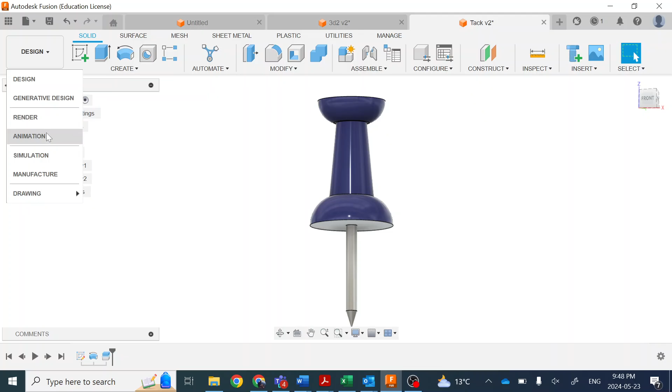Okay, so I want to guide you through how to create this thumbtack. And here's a rendering of the thumbtack here that I've created. You can see it in that image there or right here. I can save this as and download it as a JPEG if I wanted to. But that's what my 3D model ended up looking like of this tack.

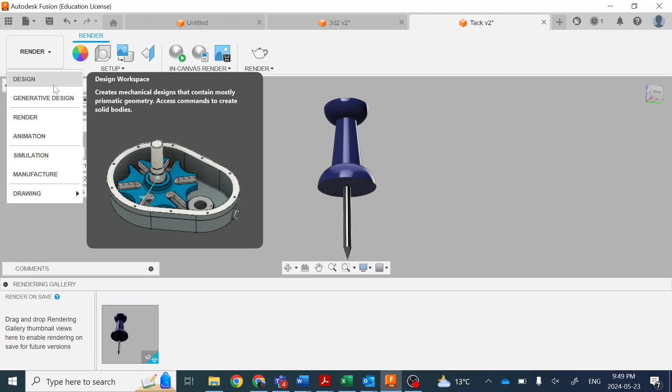So let me go into the design part of Fusion, and here's my design here. If I look at my timeline, you can see that I've actually only done 3 operations to get to this point. I press play, start with a sketch, creates a body, and then I actually just separate the 2 bodies and add an appearance to each of them. The sharp steel part as well as the plastic top.

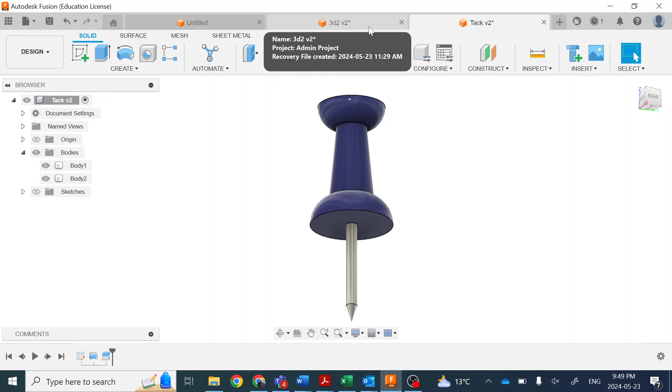Alright, so let me show you how you can do that. So I'm going to start a new design, and I'm going to start by saving it, and I'll save it as thumbtack, save, and then I'm going to start a new component. I'll call that thumbtack as well. Even though this is just going to be one component, it's a good habit to get into. You can see it shows up in our browser there.

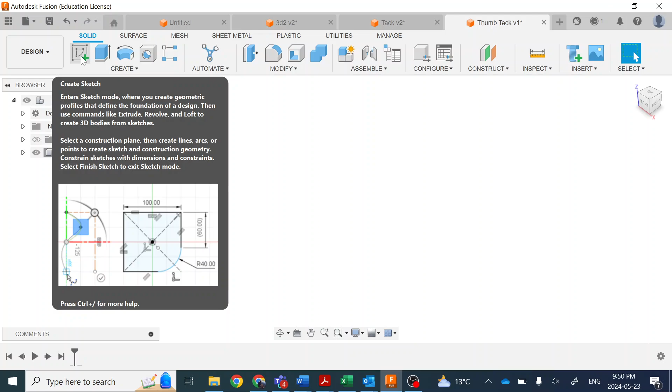Okay, just like always, we always start a model with the sketch, or typically we do. I'm going to start in the XZ plane here, so I can either click at that point there, or I can go under origin and go to XZ there. Alright, so now I'm in my sketch mode here. My sketch toolbar has showed up, and I'll show you what we're going to be sketching.

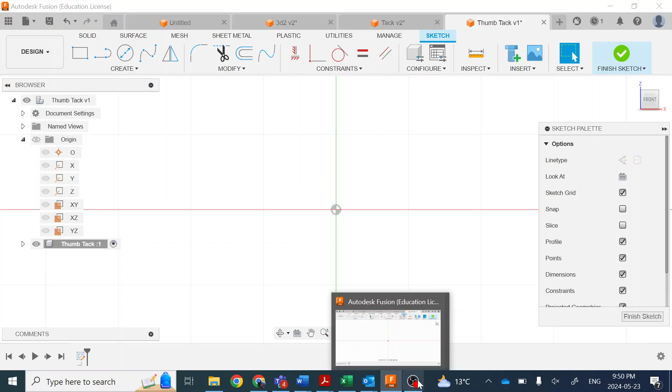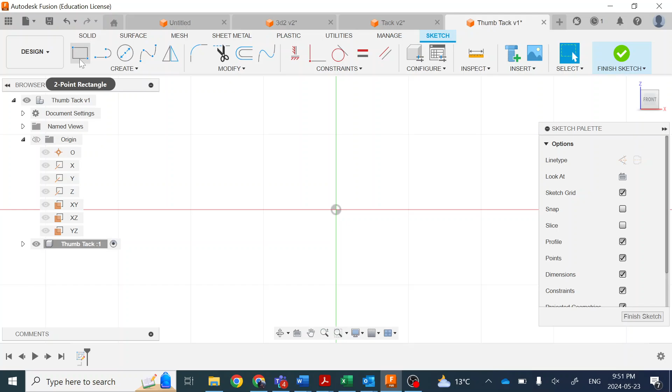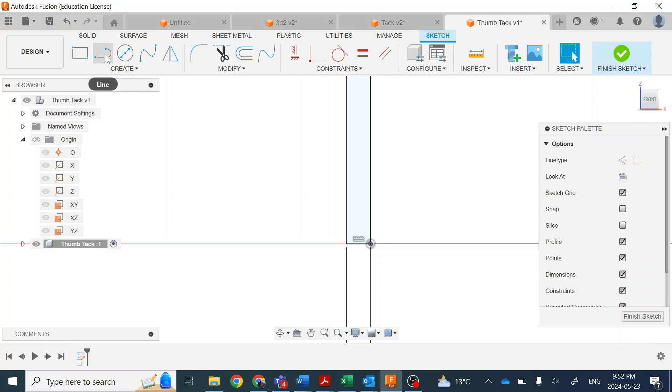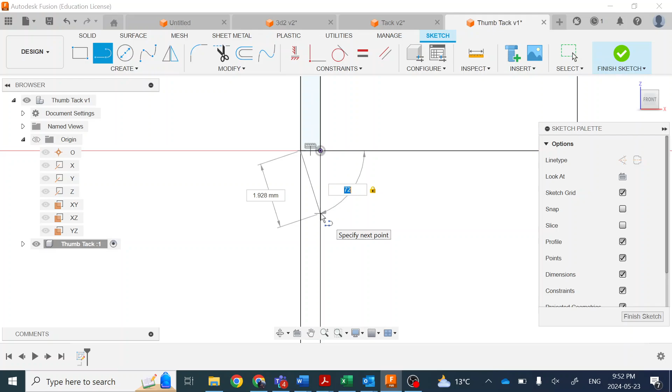Now from this point to this point here is 90. So I actually just want to subtract 18 from 90, which is going to be 72. So I'll type that in there. And you can see it's locked in. And I'm going to take it to that mid line there, right there. And I'm going to draw a line up as well. Now I'm going to make sure I got a vertical constraint on there so that it's locked in vertically, this line to that line. And you'll see that it turned black now. And I got that vertical constraint glyph there as well. Okay.

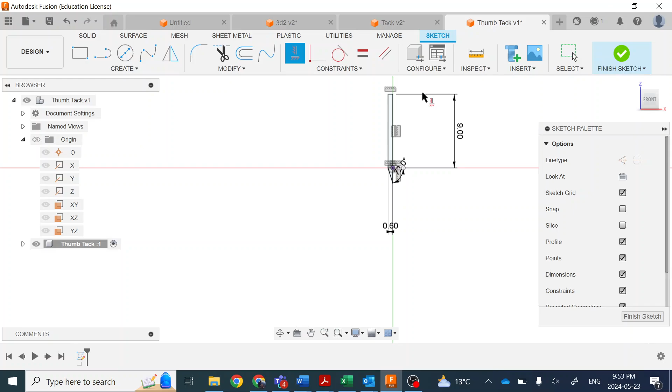So I'm done with the steel part of it. So now let's just go back to my image here. And you'll see that this rounded over portion, it goes up 3 millimeters. And that the total diameter, if I look at the extension lines, is 9. So I know that this line here is going to be 4.5, half of 9, and it's going to go up 3. So I'm going to start with that.

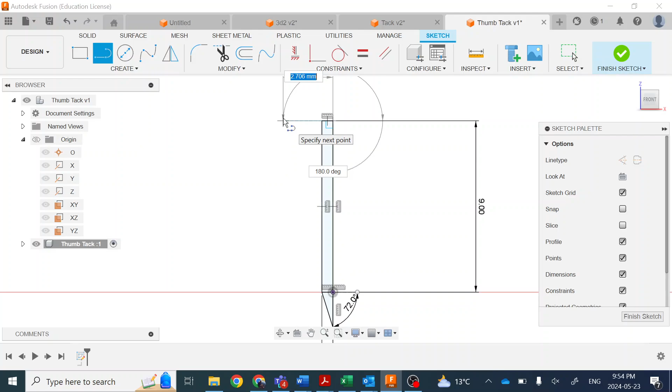So from this point here, it's going to go over 4.5, half of my diameter of 9. And I'm going to go up another 3. Okay. And now I'm going to turn off my dimensions just so I can't see them because they're kind of getting in the way.

And if I take a look at my PDF, I know that from this point here up to there is a radius of 3.2. All right, so I know that if I draw a temporary line from this corner here, 3.2 back, that's also going to be my radius. And that's going to mark the center point of a circle or an arc. Okay, so let me show you that.

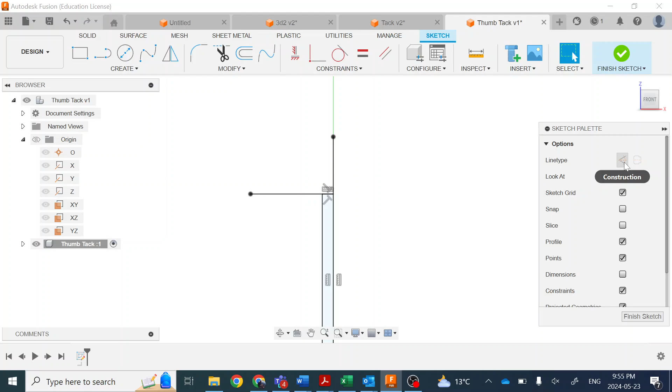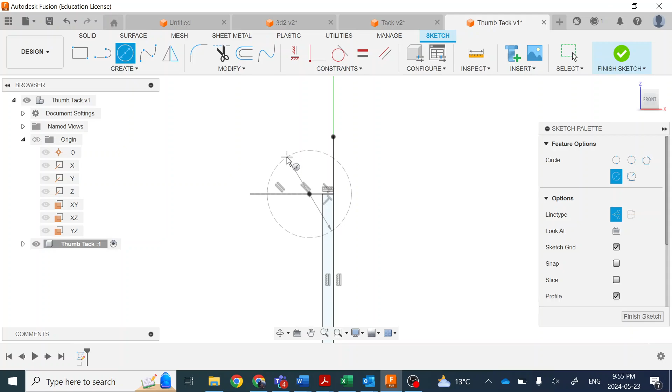I'm going to draw a construction line. So I've clicked on my construction. And I'm going to go over 3.2. Okay, so that gives me a mark right there. And now I'm going to draw an arc, or I can draw a circle with a radius of 3.2, which would be a diameter of 6.4. All right, so I'm going to use my center point here. Draw a circle. Now I'm going to get out of the construction line because I want to actually keep this. And draw a circle in there.

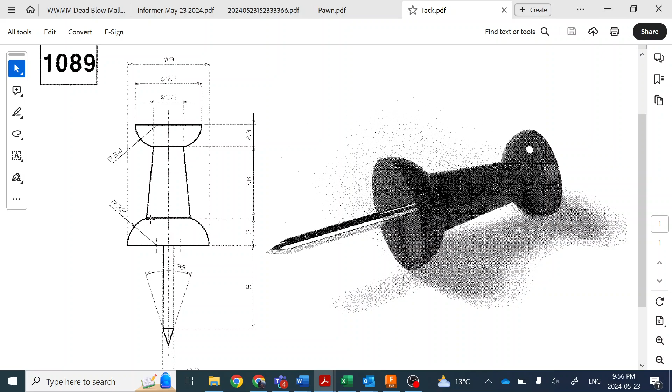Okay. So I'm going to end up trimming quite a few of these lines here. And I can start with this one down here, just so it's not so cluttered, and that there. And now I know that this diameter here... well, actually, we don't necessarily know the diameter of this line here, but we know where this line here going 3 up intersects with that circle is going to mark this point here. So this is a bit of a puzzle to be solved. It's not super straightforward.

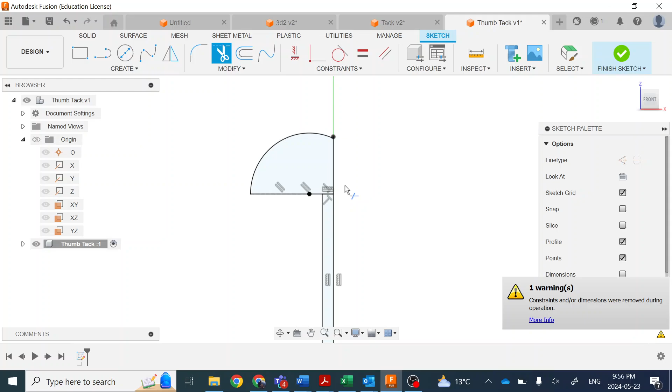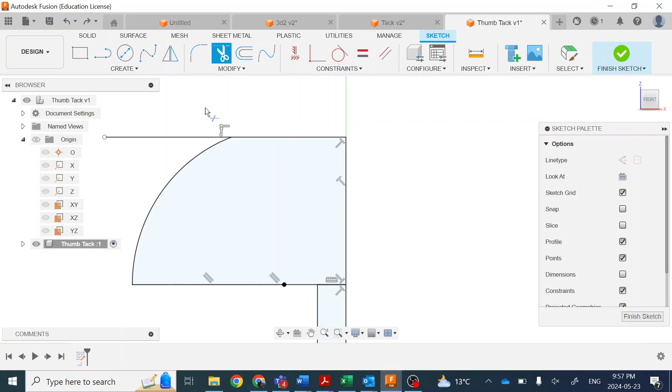So let me just show you. We know that the top of that line was this point here. If we drew it straight across, where this line intersects with that arc is going to represent that point there. So let me trim away some of the clutter again. Line, and that line. Oops. This one here. And that's what I end up with. Okay, so let's just compare it.

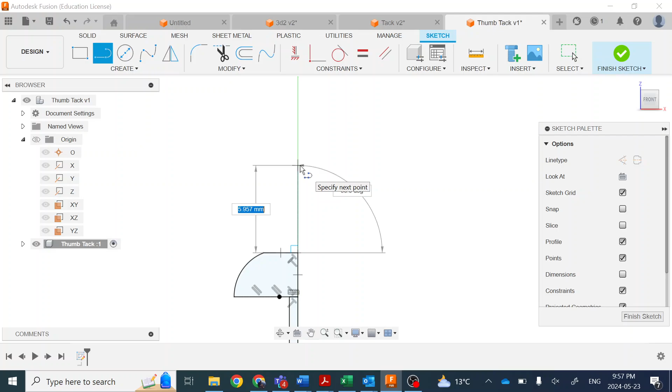Now I know that I have an angled line going 7.8 millimeters up, so I'm going to mark that line there, 7.8 millimeters up. 7.8. And I know that my diameter at this point here is 3.3. So again, to get the line from that point to that point is going to be half of 3.3, which is going to be 1.65.

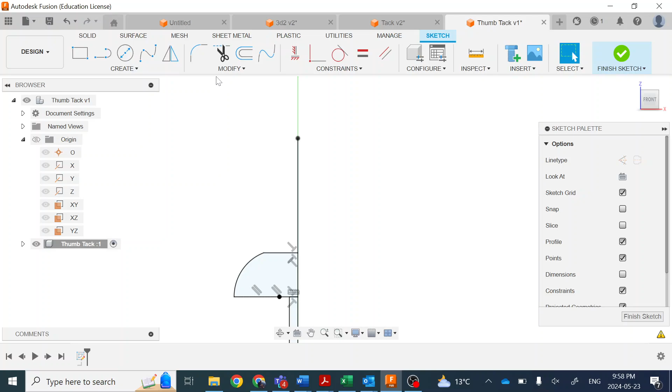So we don't know what the angle is, but we're just going to connect those lines. 1.65. And now connect that endpoint with that endpoint right there. Okay, it's taking shape. Now I just got to finish it up with this part here.

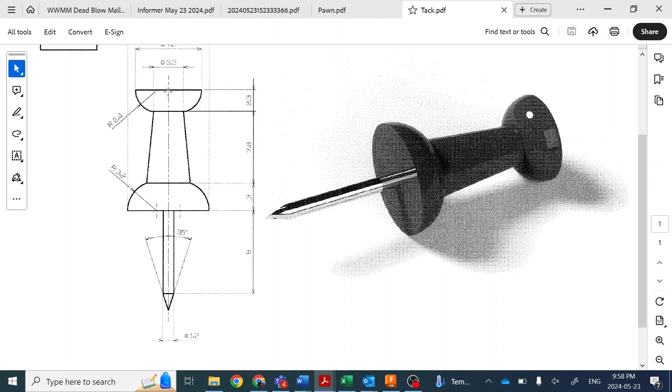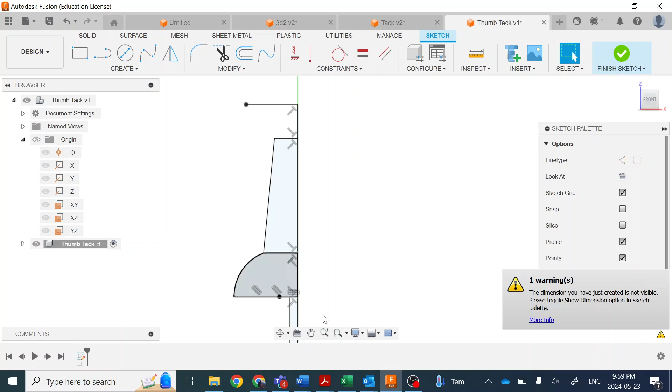Okay, so now I know that the top of the tack goes up another 2.3, and that line has a diameter of 7.3. 2.3, 7.3. I'm gonna go 2.3 up. And then 7.3, half of that is gonna be 3.65. 3.65. Okay, and now we just gotta connect that with the appropriate arc. Oops. Let's go to that one.

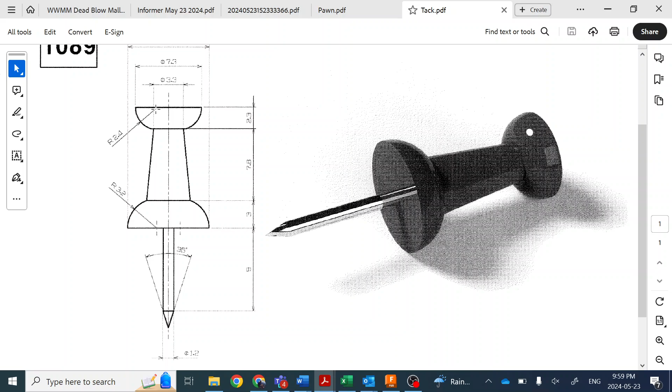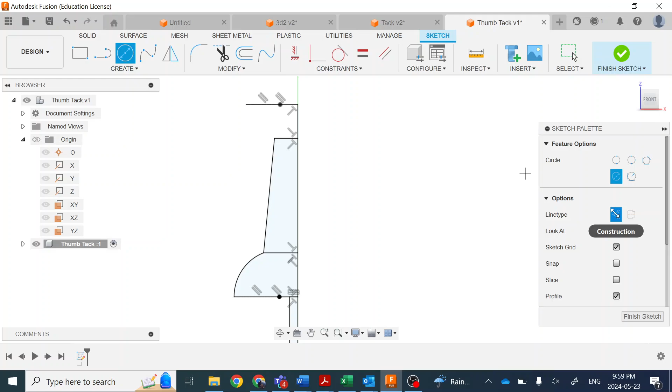Okay, so this arc has a radius of 2.4. So again, I'm gonna do that same sort of thing. I know that the radius from this point here, which marks the center of the arc, to that point there is 2.4. So I'm gonna mark that temporarily with a construction line. So back from that endpoint 2.4. And then draw a circle with a radius of 2.4, which is gonna be a diameter of 4.8. All right, and you'll see that those lines actually touch, which makes sense.

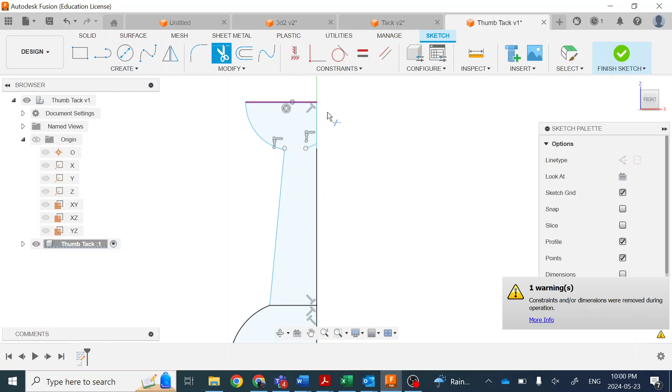Okay, so now again, I'm gonna trim a bunch of my lines here. I'm gonna trim away that and just connect it with the horizontal line. Okay. So now you see that a lot of my lines are blue, which means that they're not fully constrained.

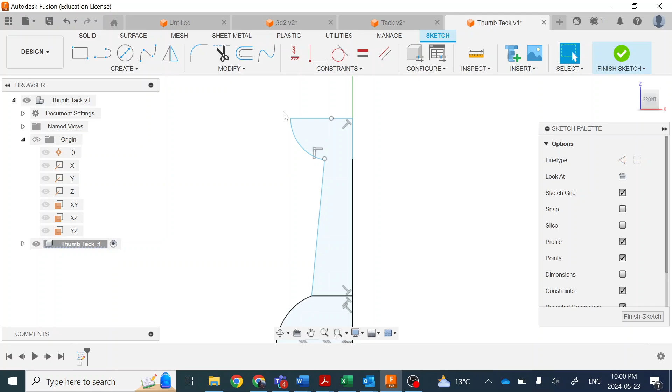So the way that you overcome that, make them black, is if we move any of these lines here, so let me just go back there, you can see that that is able to get shorter. So if we put a dimension on there, that should not happen anymore. So let's do that.

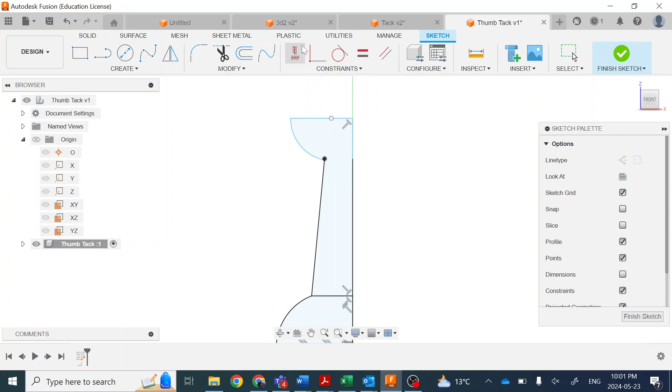Okay, and you'll notice that it turned black. And let's put a horizontal constraint here, and that turned everything black. So that's preventing this line from being able to be angled in any which direction. Okay, so now our thumbtack, half of our thumbtack is fully constrained, and we can finish our sketch.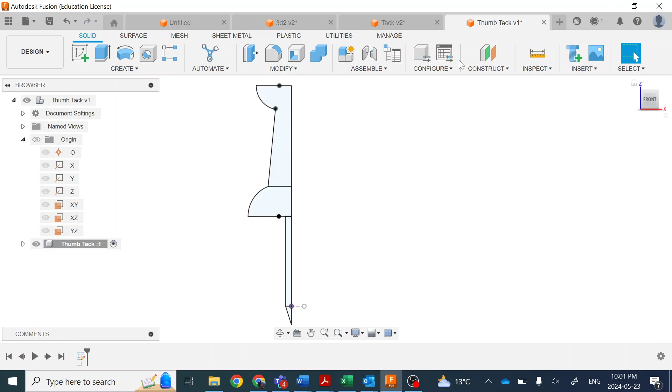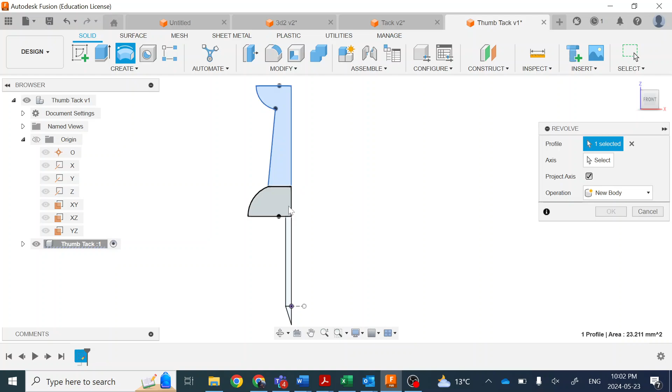Okay, so we're gonna move past extrude, and we're gonna use the second most common way to create a solid body, which is revolve. So if I hover over there, I'll revolve a sketch profile or planar face around a selected axis. So we're going to select this profile that we've created, all of the enclosures, and then we got to select an axis for which we want that profile to be wrapped around. So my axis is going to be this line here, or a segment of that line.

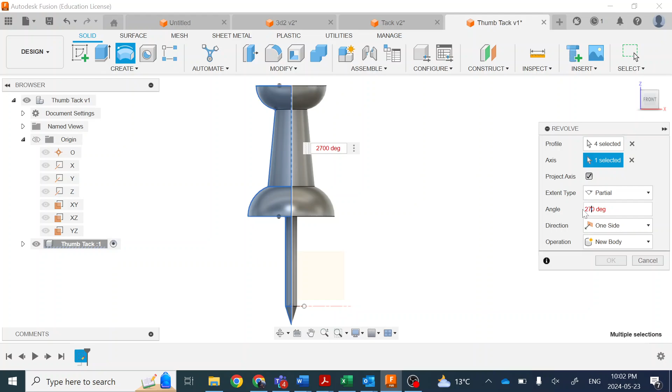And you can see that I got an angle. So if, let's say, I want it not to wrap around 360 degrees, let's say 270. Now I'm getting a portion of a tack right there, part of the pie. So I'm obviously going to change that back to 360, so it wraps all the way around. I want it to be a new body, yes, so I'm going to press OK to all that. And there I have my tack.

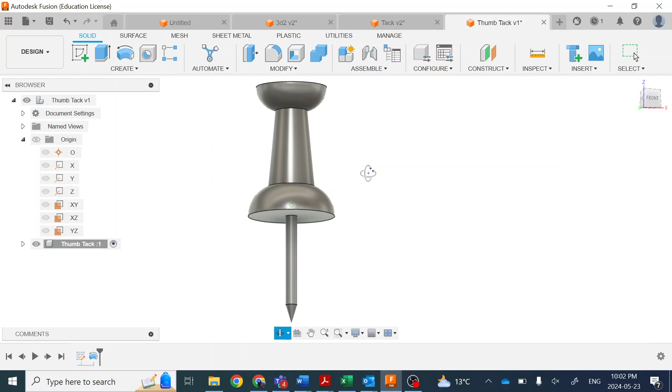So most of the legwork for this particular model happened with the sketching, trying to figure out the geometry of that sketch. And then it was a simple revolve to try to get this. So we use revolve for things like making a glass, a mug, trophies, chess pieces, stuff like that. Anywhere where it's going to be symmetrical and round.

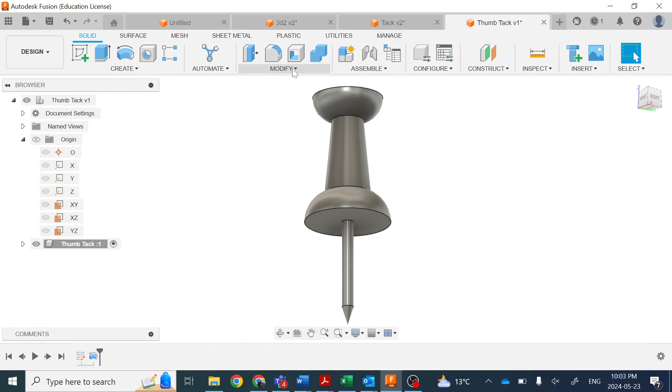So there's my tack. Now I want to add a bit of an appearance to it, so I'm going to go under modify, and I want to give the thumb portion of the thumbtack some paint, and I'm going to make it blue, enamel, and glossy. So if I bring it over to this particular tack here, well, it's going to turn everything blue.

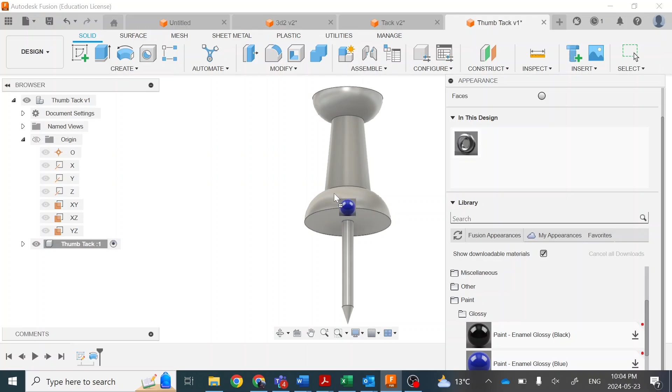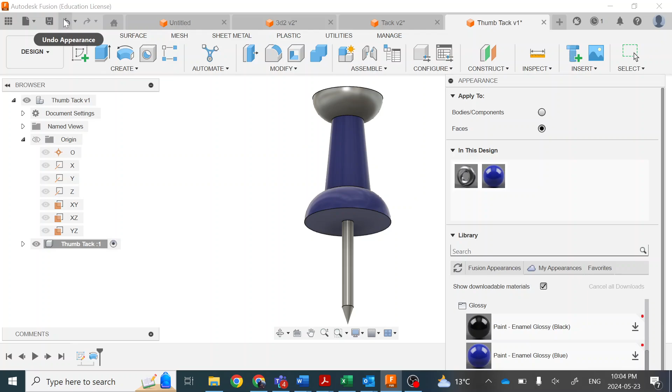Now I could toggle over and apply it to a face, so let's back up for a second. Go back to appearance, and I'm going to click face instead. And I can paint each individual face blue if I wanted to, which could be a little tedious. The other option I have is to actually split the thumbtack into two different bodies. So that's relatively easy to do.

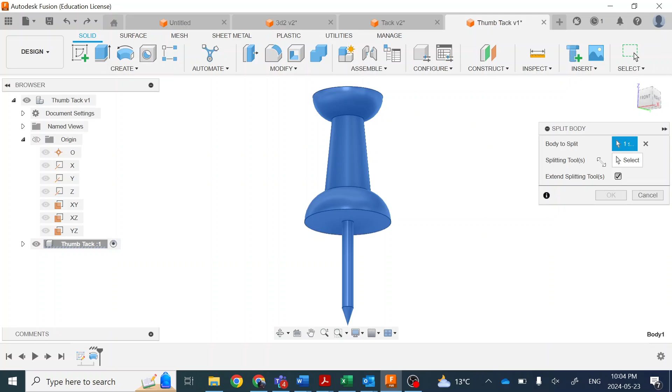If I go under modify, I'm gonna go split body. I'm gonna select the body I want to split, which is this one here. I'm gonna select the splitting tool. Now I want to split it at this plane right here where the metal would meet the plastic. And there, it brings it in for me. I'm going to press OK to that.

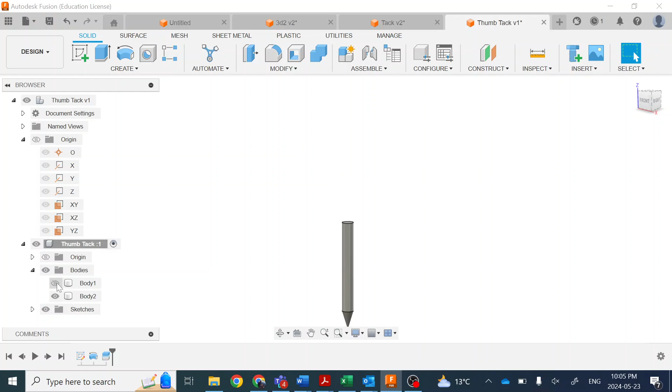And now you can see that under my thumbtack here, under bodies, I got two bodies instead of one. If I click on that one, if I turn off the visibility, I no longer have the top part. If I turn off that visibility, body 2, I've turned off the second part. So that's handy when it comes to creating appearance and giving it different material.

So I'm going to press A. Apply to Got bodies or components. So the top I'm going to make blue, and the other bit I'm going to make out of stainless steel. Which one? Let's go with satin.

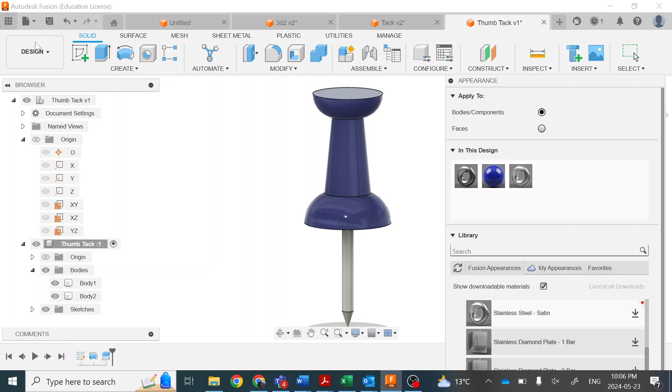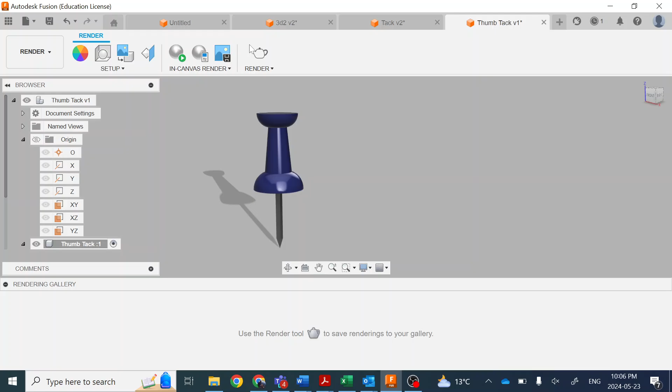So again, it doesn't look like much when you see it in the design space, but if you click on render, that's where again we can create a photo quality type image. So once I got it in here, we can change different aspects. I can bring in a decal or some sort of image to add to it. We're going to just keep this simple and simply render it immediately, and that's going to create a photo of the particular tack.

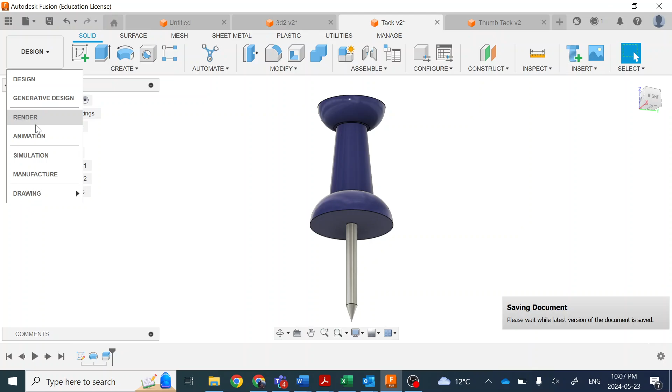Now, if you saw there, it can take up to 20 minutes to actually render. In my case, it's going to take less than 10 minutes. It depends on the quality that you're looking for, etc. But it does take time. And once it does finally happen, you can download it and save it onto your computer. But it should look, again, something like this here. Okay, so that's a thumbtack. That's how to do it.